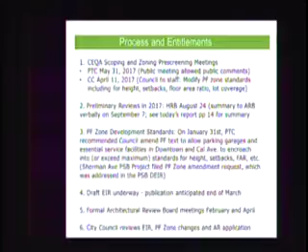So this gives an overview that is contained in the staff report. You saw this project last year, with a different constitution of the ARB, in September. Those excerpt minutes were forwarded by email to the board, and there was a link in the staff report as well. As noted, the Planning and Transportation Commission on January 31st recommended the proposed zone changes that were requested with the Sherman Avenue Garage and Public Safety Building project.

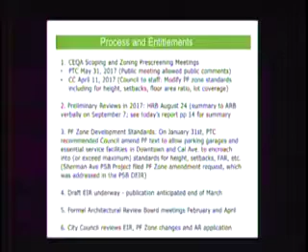Those changes would allow council to approve case by case each project, with modified zoning standards for public safety or essential public facilities and public parking garages within downtown and California Avenue in the PF zone. These included height, lot coverage, and setbacks, including the special setback. I'm going to kind of skip through because my voice is getting tired. As you can see, I'm handling both projects. I don't want to walk you through this, but this is what I'm faced with.

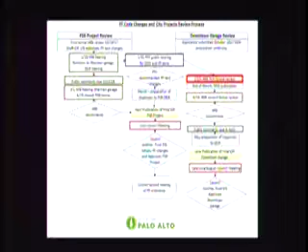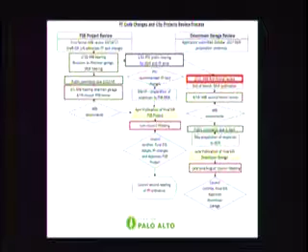Personally, the goal is to get both—there are really three projects: the public parking garage on Sherman, the public safety building, and this project—through the process to the council for them to approve the final EIRs for the two projects and the zone code change.

We have some flexibility for the number of parking spaces in the garage. Though the council said how many to put in, we have some flexibility because we're proposing to remove the mailbox that's in the public right-of-way, which people drive by to use across the street.

In addition, some council members noted their interest in having lift parking in this downtown garage. That's being explored, and that's the reason for the delay in the draft EIR.

This drawing shows a concept our Transportation Division staff has put forward to improve the pedestrian experience through the garage from Hamilton towards the proposed pedestrian alley.

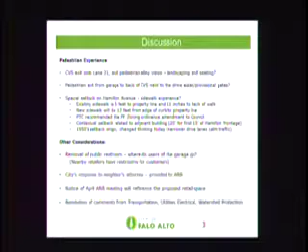Okay. Getting tired. Our discussion today is, of course, to provide guidance on this project.

Some questions have been raised, particularly about the pedestrian experience at the back of the building near CVS, that interface, and questions about landscaping and seating. In the staff report, we recommended additional attention there with taller landscaping along that facade.

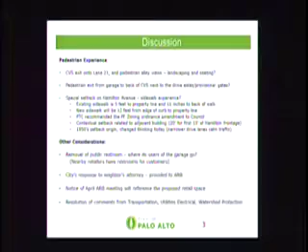Another question raised was about when the parking system goes in with gates preventing cars from going through without paying in the future - where would pedestrians go who are parked at the back of that garage when they want to go to CVS? That was a good question, and we're exploring it now.

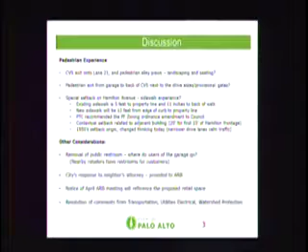The special setback dates back to the 1950s, when the thinking was car is king, give more space to cars, widen the street at some point. Well, our thinking has changed, and we prefer narrower streets to calm traffic. So in any case, it's been recommended.

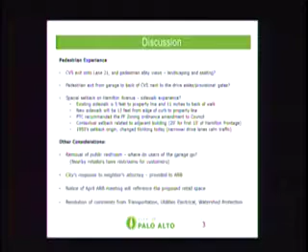The contextual setback in this area is of interest. Certainly the AT&T building next door has a 7-foot setback, but this proposed project has a building separation providing a 20-foot setback for the first 15 feet of the building next to the AT&T building, with the remainder on the lot line.

To compensate for that, the project has a wider sidewalk proposed. The other consideration, as Chair Furth mentioned, is the removal of the public restroom. There are nearby retailers, including CVS, that have restrooms for their customers.

I'm going to move forward. I do have a slide for the Downtown Urban Design Guide, Hamilton Avenue District, if you want to see it later, let me know.

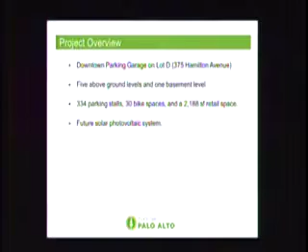So Council's direction for the redevelopment of Lot D, the existing parking lot, was 5 levels above ground, 1 level below ground, 334 parking stalls, bike spaces, a retail space on Waverly, as well as future photovoltaic panels on the roof. The project site is 29,000 square feet.

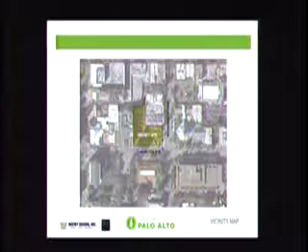A little more context here, showing the project in the center. It's currently zoned PF, surrounded mostly by CDC, GF with a P pedestrian overlay zoning district, although the AT&T building is PF, as is the post office, which is also historic category 1. We have a historic category 3 at the Palo Alto Toy World on Waverly, as well as the Victorian House next to that, and the Decker Oaks building on the corner of University and Waverly, also historic.

You can see here the 7-foot setback across the front. We will be widening the sidewalk on Hamilton, reconfiguring the drop-off for the mail. This sidewalk will be 12 feet. The sidewalk along Waverly at this location will be about 18 feet, so we're extending those out to create a more generous area.

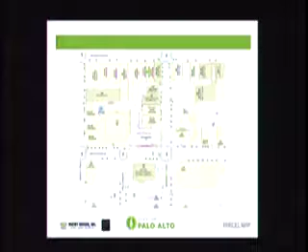Lane 21 enters here and exits onto Bryant Street. It is one way in that direction from Waverly to Bryant Street. Just some images of the surrounding buildings.

I showed you them back in September: the AT&T building, about 25 feet taller than our building; the All Saints Episcopal Church, 400 Hamilton, all clad in brick; and then we have the historic post office image there with its arcade across the front.

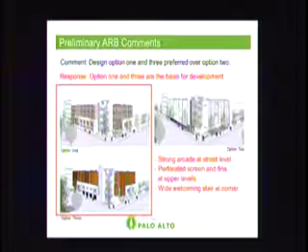So when we were here in September, we showed you three options, with some focus on options 1 and 3. Options 1 and 3 had a strong arcade at the ground floor level, both on Waverly and on Hamilton. They had perforated metal panels or metal fins that added interest to the garage, while also allowing for required ventilation—this is a naturally ventilated garage at the upper levels. They all had a corner plaza as well as a larger welcoming stair than this option here.

So we focused our, what you see today, on kind of a combination of options 1 and 3.

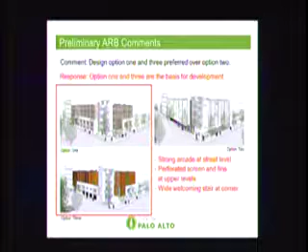Some of the changes made based on your feedback: this is a detail of the corner. Originally we had a 28-foot deep retail space, and I think everyone thought that was a little bit shallow, so we've now made that 35 feet, increasing the depth. We've also increased the area by about 450 square feet.

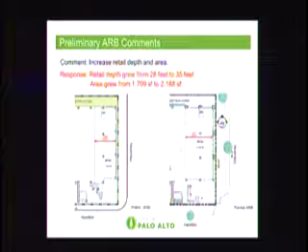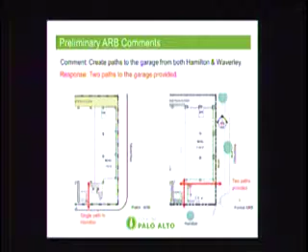There was some concern about how you see into the garage from the street frontages. Before, there was just a single path from Hamilton—you really couldn't see through in this direction. So the idea was to reconfigure this corner plaza, make it a little bit more generous, and push the elevator back so we can create a clean pathway here and one coming in from Waverly Street, so that no matter where you're coming from, you can see into the garage. That helps with wayfinding and also safety.

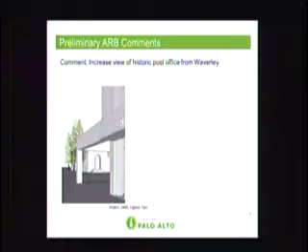Walking down Waverley, one comment that really applied to option 3 was: is there a way to make sure the post office is afforded as much view opportunity as possible? So the option we have today has pulled everything back that went into the corner plaza, so that as you approach the corner on the ground floor, you see the post office and its main entrance as soon as possible.

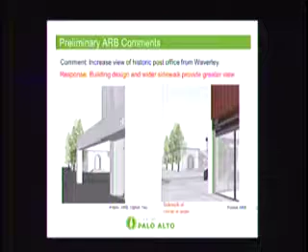Then we wanted to create a walkway to CVS, and we really like transportation's suggestion, at the expense of some parking. So now we're at 334 spaces instead of council's direction for 338, but it does create a great way to come into the garage.

You'll be walking along where all the bike racks would be. We think we can expand that bike rack area to include space for people with strollers or bike trailers, increasing the potential for parking. It's not on your plan, but it's on the slide you see here.

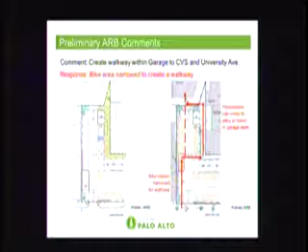Then we have a right angle crossing that sends you right to the stairway, which comes from four levels above and feeds into this pedestrian connection, as well as the alley connection behind the buildings facing onto Waverley Street. So we get a little synergy here, which I think would be really great. It reinforces people coming down—it's a circulation point that will probably be used more frequently than the one over here on the corner.

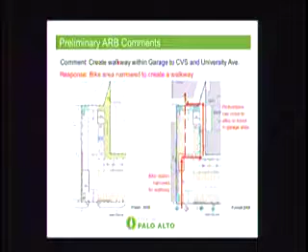And then future underground parking at adjacent lots—there was concern about Elizabeth Wong's and Brad Ahikian's parcels. The thinking is that from the basement level, we could plan into the structural walls blockout panels to allow connections here. At grade level, the proposal with the alley in the back is actually wider than what they have now on those parcels, because what they have now is just the drive aisle of the parking lot. That drive aisle will become an alley, about 2 feet wider than the free space they currently have for garbage collection and pumping the grease interceptor.

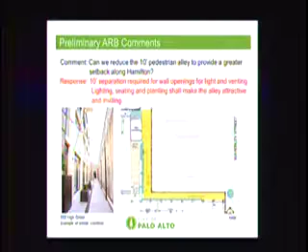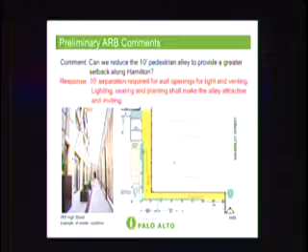Can we reduce the 10-foot pedestrian alley to provide greater setback along Hamilton? We can, if we want to get rid of about 70 cars. Our advice is not to do that, but instead to put attention into the detail and amenities of this pedestrian alley. The garage is down to the bottom of the screen—this is Elizabeth Wong's building, this is Brad Ahikian's building, and this is what we're proposing as that connection, that linkage. We need it for ventilation for the garage—we need 10 feet.

Anything less doesn't work, so if it's less than that, we're going to have to go to a mechanically ventilated garage. In my opinion, that would be a waste of energy.

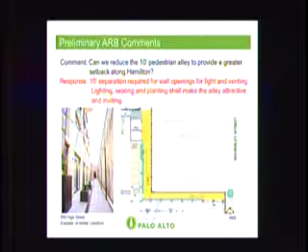This terminates with a view corridor towards the All Saints open area of their front yard, and in this direction becomes the alley. We have a combined trash enclosure here, with provisions for them to get to those trash enclosures, get behind their buildings, and do any servicing needed at the grease interceptors. It's more room than they have today, if there's cars parked in the parking lot, that is.

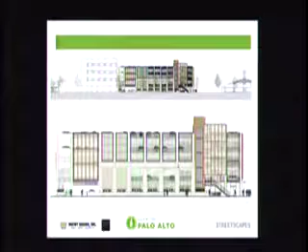We have a combination of metal fins above to provide some interest. They're controlled by a metal frame that wraps around them, and then erode the corner at the end to highlight the elevator core. The stair becomes an enclosed stair now with perforated metal around it.

Before it was an open stair, and one of the suggestions was to make that an enclosed stair. However, the stair descends out of that volume so that you see people moving up and down quite easily to the plaza here.

The perforated metal denotes the entrance there. It also denotes the entrance here, and it denotes the stair at the back when you've walked down the alley.

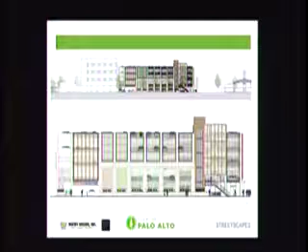This is the facade for Waverley, and again, we're trying to pick up on the 2-story rhythm and height of the buildings on that block. This is the historic building here - I'm sorry, one more building down is the historic building. We're trying to relate to the cornice line of that building.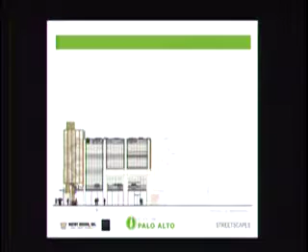And then the retail space below, you see there with the glass, and above that would be a decorative metal screen that would conceal the cars, but bring that color and texture of the metal into the project.

View from Hamilton, looking west. You see the corner facade here. The materials are a sandblasted concrete for the arcade. We're really trying to bring in the color that you find in the sienna or terracotta tiled roofs, the brick on the corner building. So I think one of the strongest ways to relate to context is through color.

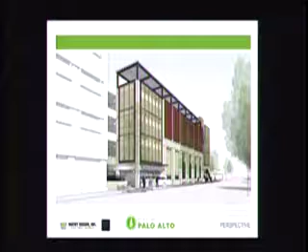You can see the perforated metal here. Again, we're thinking that all the metal is some kind of a bronze color, so it's dark - not anodized aluminum in any kind of aluminum color.

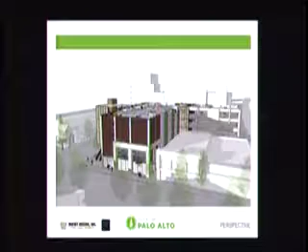This is if we add the solar panels on top, what that could look like, and then a view from above and across. You can see the perforated metal again back here at that stair that you see when you look through. We have the solar panels above, and then some detail of the plaza itself.

In 30 seconds, and I'm there. You take what time you need. You're the only agenda item. Okay.

So we want to bring that decorative metal quality into the stairwork, and you see it coming down to the plaza, and that would wrap up and through this perforated metal screen.

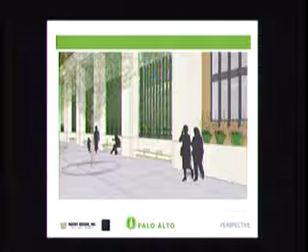This would be a detail of the benches, the back slopes, so that you could be comfortable there. The integral planters here - this is where the vines would infill those areas, and then we have the decorative metal screen behind that as well.

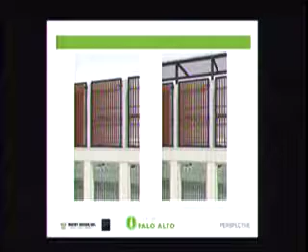Just some detail of the fins with the metal work around them, and then what that could look like on the right-hand side when the PV array is added.

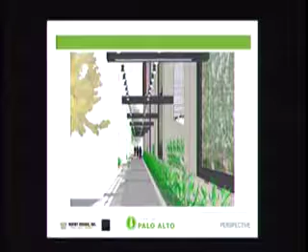And then lastly, this is the alley. You see beyond the destination, the stair, the metal screen again, because it is an entrance identity. And then if you walk down to that stair and look back, you can see how we could start to animate that alley with plant material.

We have bench opportunities, and some interesting lighting, so I think it could be a really interesting space. If you want to see a space that's similarly scaled, go to Chop's new building on the corner of Hamilton and High, and look at the alley between the Palantir cafeteria building and his new building. It's almost identical, but I think we could really enhance that space. It could be a nice space.

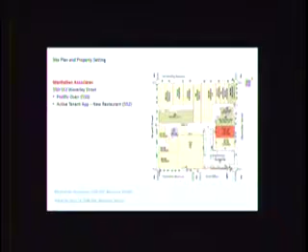We're here working with 2 of the property owners: Manhattan Associates, represented by Brad Hikian behind me, who own the building where Prolific Oven is, and Elizabeth Wong with Waverly Post, also behind me, who owns the building right next to that where the Taipan restaurant is. Those are the 2 buildings most immediately impacted by the construction of the garage itself.

For people at home who haven't had a chance to read the letter that was provided to you just yesterday, I'm going to walk through the presentation so people later can view this at home on their own, to get a high-level overview of some of the design issues we're requesting additional accommodations on as part of this project.

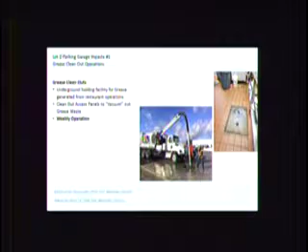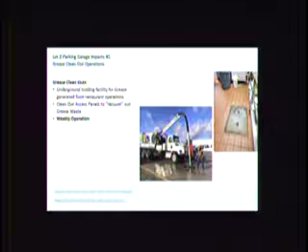You basically need the equivalent of what's called a Vactor truck. City staff use these around the city to clean out storm drains. They're used all over Palo Alto and other restaurants to pull out that debris, and they're cleaned on a weekly basis at the restaurant at Tai Pan.

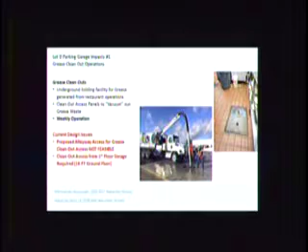What we're seeing right now is that the only feasible way for both these buildings to access the grease pits that exist, and all others being planned right now in construction in Brad's building—you have a new application for another restaurant that will be building a second grease trap—is that you have to have a much higher ground floor. There's no way these Vactor trucks can connect the additional hoses and vacuums to back-draw all this debris from these two kitchens from the alleyway.

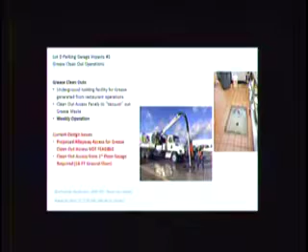You have to have access from where it takes place today, the equivalent of the lot on the ground floor, and that would require a much higher ground floor. I think right now you're about 11.5 feet. You probably need closer to a 16-foot ground floor ceiling height to accommodate any of these service vehicles, including the grease trucks and potentially trash removal vehicles.

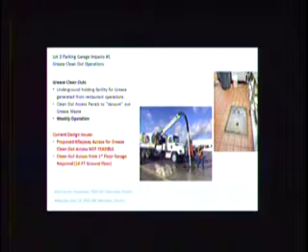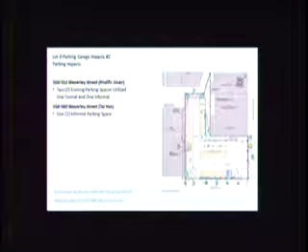Regarding parking at 550, 552, Prolific Oven currently has 2 parking spaces. One's kind of dedicated to the space formally, and they operate a second parking space that they use regularly, informally. Informal versus formal, that's still parking used by these buildings that will get lost both during and post-construction. 558 and 560 Waverley, where Tai Pan is, doesn't have any formal spaces, but they use one space regularly every day for different operations.

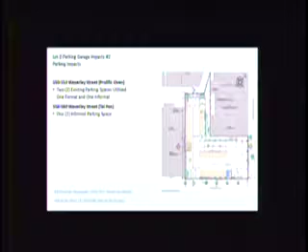So we're talking about immediately 3 spaces that are going to get lost. And what we're seeing in the plans provided by the city is that only 1 parking space is being provided back to the Prolific Oven building, and there's an inequity in the parking distribution back to the Tai Pan restaurant building with no parking. So that's definitely a big concern for the team.

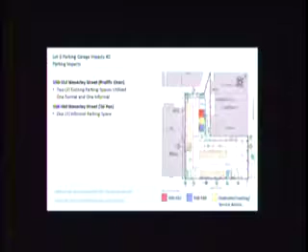What we're suggesting the city consider is to dedicate additional spaces within the ground floor of the garage immediately behind the buildings. There's 6 spaces shown on the northeast corner of the building. We would request that 2 spaces get provided per building, as well as a dedicated commercial loading zone with that higher 16-foot ground floor. Service vehicles can get in there, remove trash bins from the garage if you had second double door sets on the inside of the garage to pull the trash out, as well as the Vector trucks to clean out the grease pits from the Tai Pan restaurant and the future restaurant at 558 or 552.

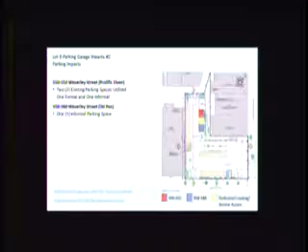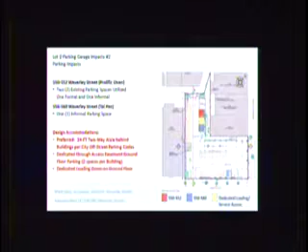Preferably, if that's not something the city is open to doing, we would request that you provide a 24-foot alleyway around both sides of the building that maintains 2-way access to get vehicles in and out. That lets those buildings preserve their existing parking, but that would have some significant impacts to the project. So we think a really good halfway point is to just dedicate those spaces back to the building owners.

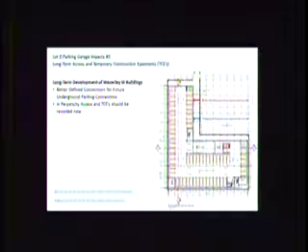Regarding future development of the buildings, the architects mentioned there were going to be accommodations to be able to punch through at the basement level of the garages for future underground parking if the buildings get redeveloped. That's a great idea, but what's really missing in the plans right now is how that's going to happen. If this was a development project, you guys at the city would want to see details about how that future construction is going to happen, but that lacks today.

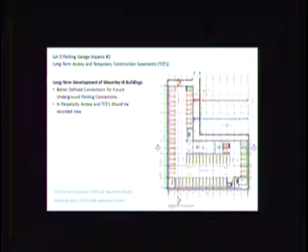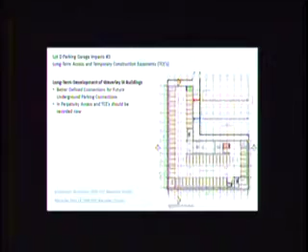There's a big concern from our clients that it's great the note is there, but if there's no accommodation or design detail, it may be found later on that it isn't feasible because the design doesn't actually accommodate for it. We really think this needs to be taken care of at this design phase so it's not an issue later in construction.

In addition, for that to happen, any developer would have to have agreements handed to the city that say we're going to work with another entity to give access to somebody else to move through our site. That actually hasn't happened for these projects. So as great as it is that we're getting notes on the plans showing future access connection points, what's most important is that you have dedicated access agreements agreed upon between the city and the private property owners, as well as temporary construction easements, or TCEs, that allow them later to punch through that wall.

In addition, the long-term parking loss impacts from those walls punching through to provide the underground access need to be documented and accounted for in the parking stall count for the project, because you're going to start out with a certain project space now, but then you're going to lose that later on when you provide that access. So the public really needs to understand what that long-term impact is going to be.

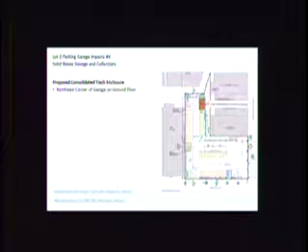Regarding trash operations, it's really good that the garage has a combined trash bin connected to the north, but that provides some significant impacts to the two buildings. It's great for the building behind Prolific Oven because the trash bin's immediately in front of their location, but for the Tai Pan restaurant, it introduces almost a 100-foot walk to actually take trash and other debris into the trash enclosure.

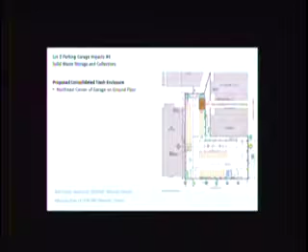That's a bit of a concern for the property owner and the businesses because that introduces the opportunity for injuries. Taking the debris that far introduces blockages to the pedestrian alleyway that the city's trying to create while all that trash is being relocated, and it introduces the opportunity for spillage and other impacts to whatever decorative pavers you're trying to create from that trash being hauled away.

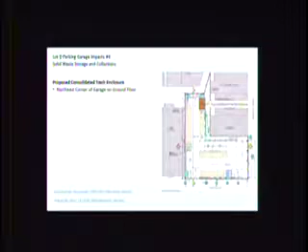The more you minimize the distance from the buildings to those trash bins, the better in the long term for the community. What we would recommend is that you consider creating two dedicated trash enclosures, one dedicated to the Prolific Oven building and a second dedicated to the Taipan building, both located immediately adjacent or behind each building to reduce that walking distance.

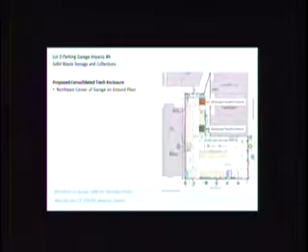Those would need to preferably remove the bins from the inside of the garage so that you're not worrying about taking debris and spilling other trash and liquids in the alleyway, staining that long-term and creating a long-term impact.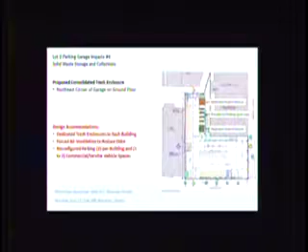What we think would work best is if you dedicate those spaces and create those dedicated bins. You might have a one parking space impact, but in the long run you're going to end up with a much cleaner operating pedestrian alleyway and a much cleaner operating garage.

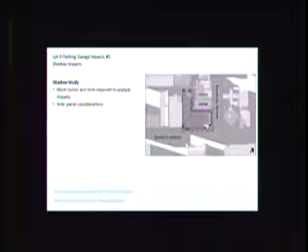Regarding the shadow study for the project, our clients are still evaluating that. We're not going to provide too much specifics on the engineering side, but we did want to make some specific notes that did bounce out to us.

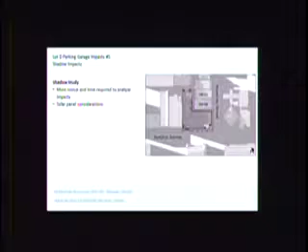Both clients were already in the process of looking at installation of solar panels to help reduce the operation cost of those buildings. We think that with those buildings coming in with their solar panels, that's going to block the ability of the sun to hit the panels installed on these buildings. That's a long-term impact we're still trying to figure out, but we wanted to make that note to you.

If the buildings were just to get pushed back 24 feet on either side to allow two-way alleyways, that would protect the ability of both of these buildings for our clients to get good sun exposure for their solar panel systems.

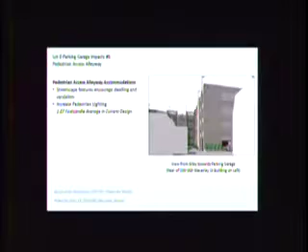Regarding the alleyway, we've already expressed concerns to the city that as great of an idea as the alleyway is, you're basically creating an alleyway behind up to three kitchens now. Those kitchens generate noise, trash, and odor that we don't think are going to be really amenable towards pedestrians wanting to dwell in that space.

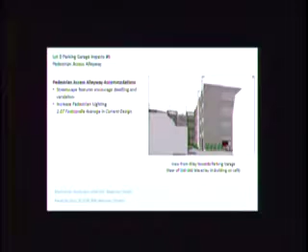The other issue is how dark it is. From this example in the architect's renderings, you can see the alleyways are already dark during almost all times of the day. What really bounced out to us is that the average foot candle lighting of the alleyway is only 1.27 foot candles. That's the same foot candle design the city uses for its public streets that all the residents complain are too dark at night.

So you can tell from here, if it's dark in the day, it's going to be worse in the dusk period, it's going to be worse in the evening for residents.

The architect's presentation showed really nice examples of lighting stretching between two buildings, but that's actually not what is proposed on the plans. All that's proposed is string lights on the garage side of the building. With that, you're not going to get the type of lighting that both buildings feel is going to be required or improve the safety of their employees in the buildings, as well as the public traveling on the backside.

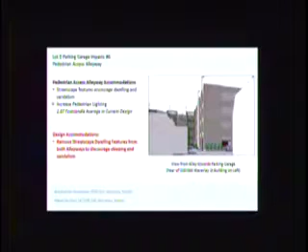The other thing is that we would request the removal of anything that would encourage people to dwell, sleep, and congregate in that back area due to vandalism issues.

Regarding the issues of the grease traps, again, we showed you how those grease traps need to be accessed. You've got to take that vacuum truck and those big vacuum hoses, push them from the garage on the first floor, through openings on the ground floor, through the back doors of the buildings and into the kitchens. The trees that are shown, the planters that are shown, those all conflict with those long-term operations.

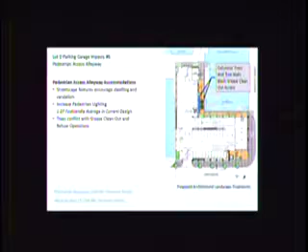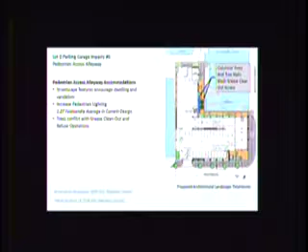This building, as shown, will kill the operations of both businesses and any planned businesses at both of these buildings. The only way to fix that is to remove the trees we highlighted in green, and remove the planter wall, and provide more access space for service vehicles to be able to get in there and maintain those buildings.

A couple of other issues regarding construction. You're basically going to be building a pit when you construct the garage. That's just part of construction.

The applicants or developers don't understand how grease trap operations are going to get maintained, but if there's an impact in cost, they're requesting the city project take on the burden of removing that grease trap during construction. Because all the loading happens from the back of the building today, they're also requesting that during construction, all or most of the parking along the frontage of Waverley Street be converted to loading zones so service vehicles can continue to maintain those buildings.

And if possible, create some type of parklet and enclosure that lets all the trash bins be stored there so service vehicles can come grab that trash, before they take it out after the project is done, and move towards preferably two storage bins on the ground floor of the garage.

We're also hoping to request weekly cleaning of the buildings, since you're going to generate a lot of dust and debris. Any private developer would be required to do that on their own outside the city, but in this case the city has to take on that responsibility. The other issue we didn't see addressed in the plans is drainage from both buildings.

Both buildings have rooftop drains that either spill into underground storm drain systems or into the alleyway. With the dark and loss of light to dry up that water from the rooftops, in the day and winter we're seeing a potential issue of rodents and moss generated in the pedestrian alleyway. So again, if you push the building back 24 feet, that allows enough sun exposure to come in and dry all that out during the day.

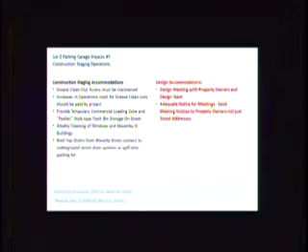So regarding these issues, all we're asking is that you let us sit down with city staff more. Staff has met with the developers and clients in the past, but they haven't responded to the issues. So these issues aren't new to the city, they're just issues that haven't been addressed. And that's the end of our presentation.

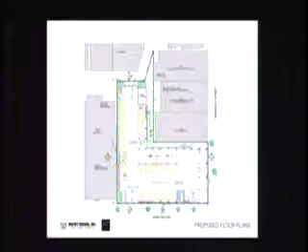But you'd lose this parking along Hamilton. I know. I guess at the end of the day, I'm wondering, is the site too small for what we're trying to put, what the city is asking you to put on there?

And maybe it is. May I just, through the chair, ask a question? I did not understand Board Member Guyer's comment about the walkway along AT&T. Were you proposing a 10-foot walkway along the AT&T building? Well, that's what I was thinking. Because that has the same effect on the parking then, right?

Well, yeah, but it shrinks it this way, so you're only losing a couple of spaces as compared to a whole row. No, I think we'd lose the whole row. I mean, unless you went closer to the Taipan building and got rid of it. We'd lose that whole row, Board Member.

Well, you could just lose it on the ground floor if we kept the upper floor, but that would be very dark, and I don't think that'd be a very good space. Where are you thinking, Roger?

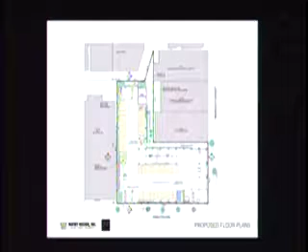Part of the concern was, looking at Board Member Balte's comment on the 10-foot alley we have along Taipan, he was saying that would be a very unwelcoming and perhaps dangerous space, with a 2-story building on one side and a 5-story building on the other. This would have a 75-foot building on one side and a 75-foot and a 50-foot building on the other side. So I don't know how that could be a good amenity if the alternative walkway is not a good amenity.

I think it's useful to do this in a slightly study session format because this is a complicated project. We've got a little time, we should be thinking about this. It's a big deal, and we appreciate that. We'll keep going with the comments, and I'm sure we'll have you up here answering questions again.

Uzma, please. Okay, so regarding site, I find that many parking garages suffer from not advertising bicycle parking adequately.

So the concept of bringing more attention to where the bike station is, with pedestrian attention, the diagram we saw today in the presentation that brings circulation through there, I think is a good choice, mainly because I think it will bring more attention to bike parking, because otherwise in parking garages it tends to get very lost.

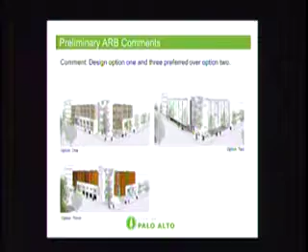I agree that the building ought to be pushed back, and it should line up at least with the AT&T building, which would make everybody happier as far as obtaining the full 7 feet.

As I said earlier, the alleyway or pedestrian access would be nice, but it's not critical. As long as we come up with something that connects from Hamilton to lane 21, there needs to be some access developed there. It doesn't need to be adjacent to the building, either through the building or something that is highly accented.

For example, Mountain View has, on Castro Street, these walkways between the buildings that have been very nicely done. I'm not saying you need to emulate that, but they've given it some thought, showing how to get from point A to point B, not sneaking through the parking garage to get to the alley. I think that's it for right now.